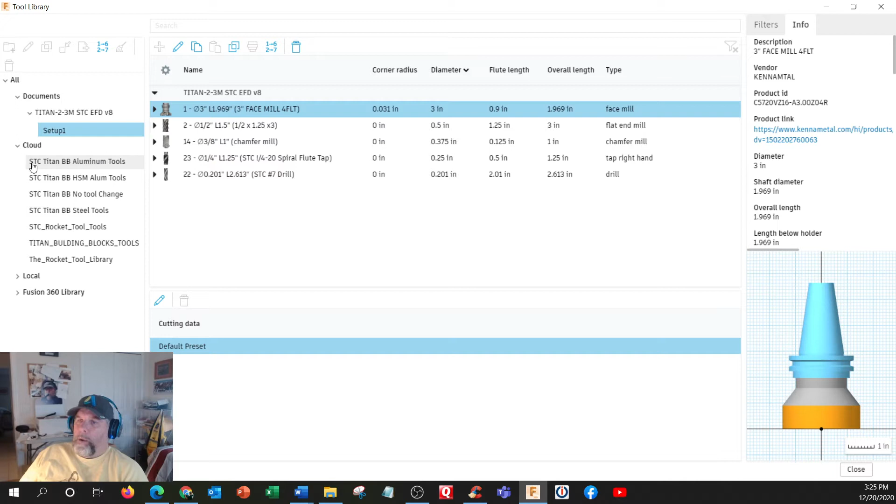So if I go into my tool library, and there's my setup right here. And I can tell these are the old original Titan tools. And now we're using our own STC Titan building block aluminum tools here. So I am going to swap over tools by operation. So the 1M's very similar as far as the operations go, other than we're using a tool 2 that is a little bit bigger, and we have different size threaded holes.

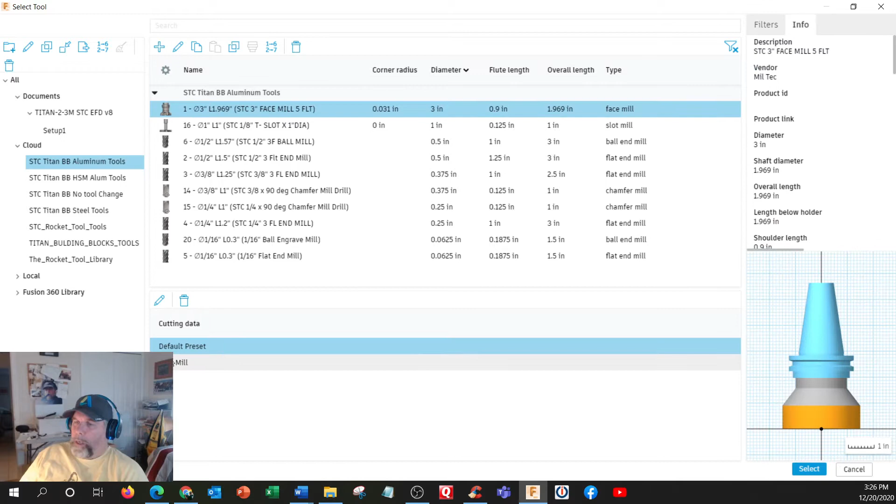So in the facing operation, I'm just going to go in and select right here, aluminum building block tools. I'm going to turn on milling, and this one here, the face mill. And this has the new preset data. So I'm just going to select that, and this one will be good to go. 3,183 RPM and feed per tooth. And we'll also have you do some lessons on what feed and speed is all about.

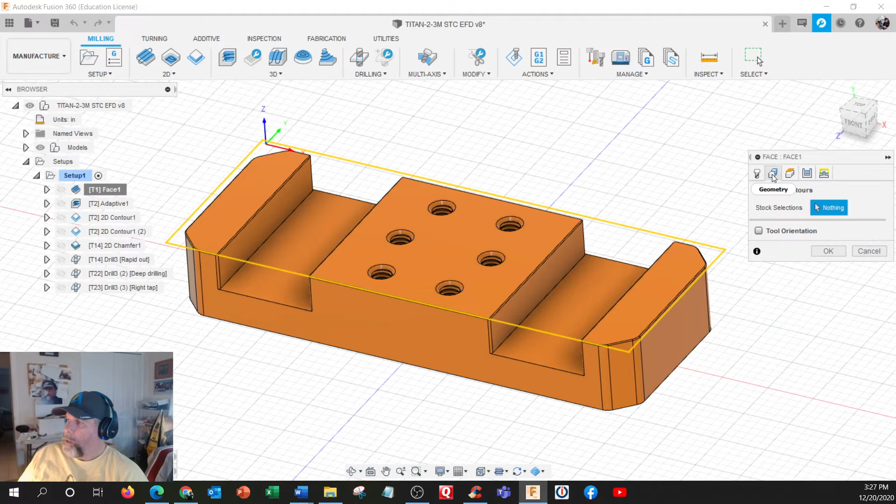Alright, so pretty much everything's pre-selected because I'm updating an operation. And before I do that, I'm going to look at machining time, and this is at 8 minutes 34 seconds. This is programmed with the original Titan method of 4,000 RPMs.

Okay, so I'm going to go the adaptive. I'm going to go select out of the building block aluminum. I'm going to click on milling, and I am sorting by size. Right here, the 3-flute end mill. If I go to setup 1, these are all the tools. Yeah, that was the original tool. So I'm going to go in here and get the...

And we're doing an adaptive operation, so I'm going to pre-select that data. So up here, this is my pre-selects. And now we're running at 5,920 at 62 inches a minute. And all these settings are still good. Model top, model bottom, optimal load. Now this is actually in the preset data, so we don't have to remember that, and the maximum roughing stepdown.

Alright, I'm just going to raise this up a little bit, or I can squeeze this up and I can hit the OK button. Okay. This one's got some recalculations involved, but that looks good. Now I'm going to go edit this one. And this has the old one, so this doesn't have the preset data, so we have to go select tools. So in this case, that tool is already in there. Notice it says this is the old tool and this is the new tool, the STC tool.

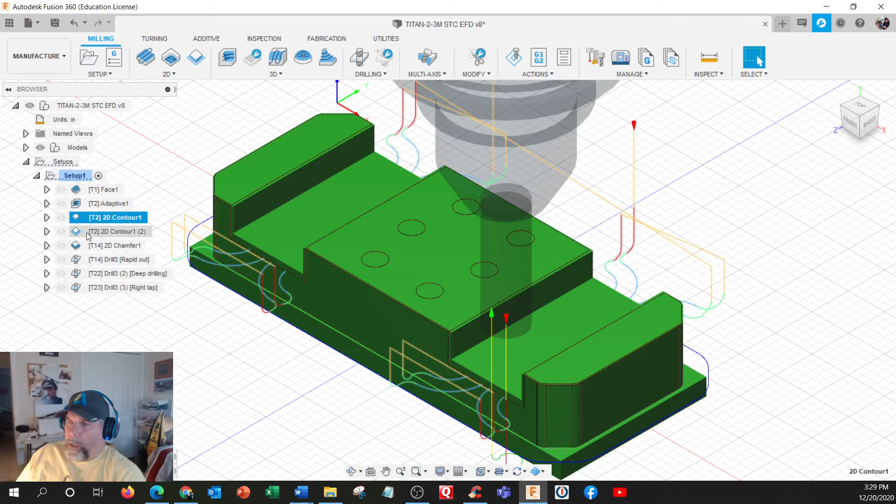So I'm going to edit this one. This one also has no preset data, so I'm going to go back into setup 1 and find the STC tool, this one here. And now we have two tools with the same tool number, so we're eventually going to switch over, and that's also a contouring operation. So I can pre-select it now. It says contouring there, hit OK.

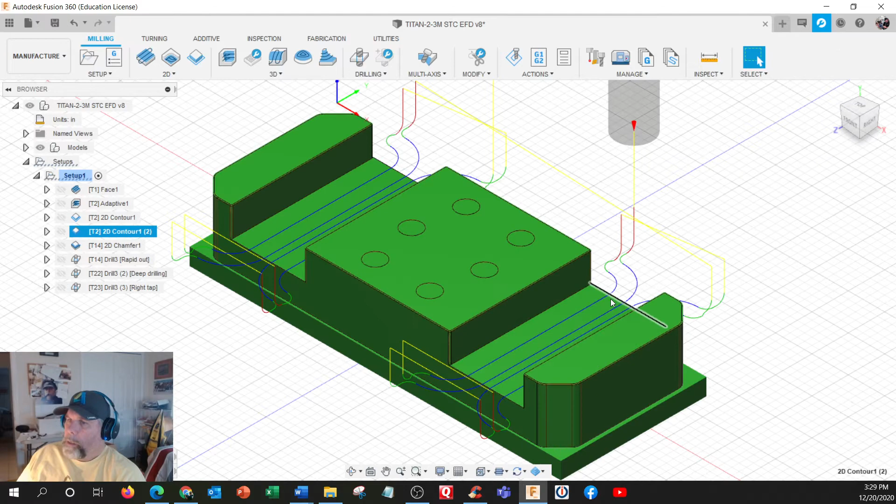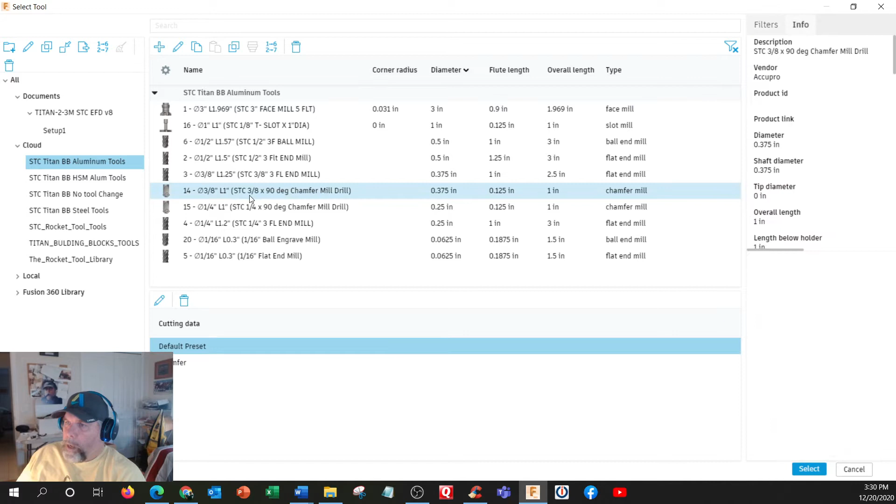Okay, now we have the chamfering tool, and I also notice, I think that has one too many cuts, but I think that'll still work. This is the chamfering tool. So I'm going to go to the new building block library. I'm just going to pick milling to narrow down the selection. And there it is right there, the 3/8 STC chamfering tool. We're doing chamfering. So I'm going to click the preset chamfer, hit select, and now we get 6,000 RPM at 30 inches a minute.

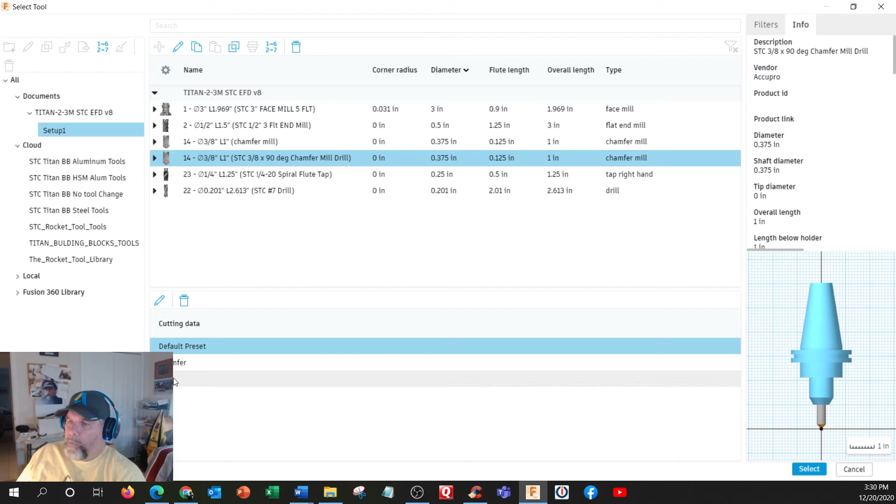Hit OK. And that tool we also use to do the spot drilling operations. So if I go to select the tool again, go to setup 1, and the STC, it says chamfer mill drill, and I got a preset for drilling. Hit select. And that one has slightly less RPM. And let's make sure our operations are correct. Model top with a negative, and we're using drilling rapid out. Okay, so that looks good.

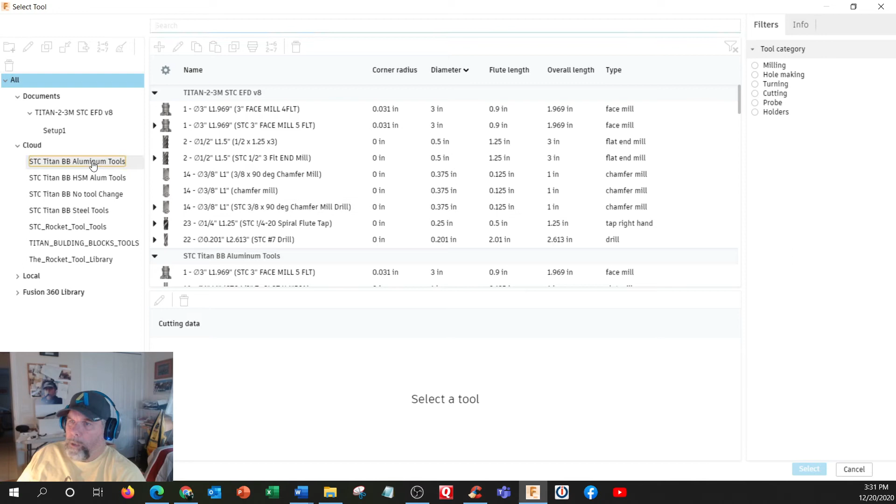And the last two I don't think are affected by the change. But let's get them all out of the library, so we're on the new library. That'll be hole making, that's drills. And this one is the 22 #7 drill right here. And it says right there, STC preset, so we can select that one. And that's all set now. I'm going to make sure it's model top.

And deep drilling. Now the pecking increment, we don't really get into this. We're going to start to step this up a little bit. We're going to use at least 0.100. I'm going to make this 0.100. This is a G83 peck drilling cycle.

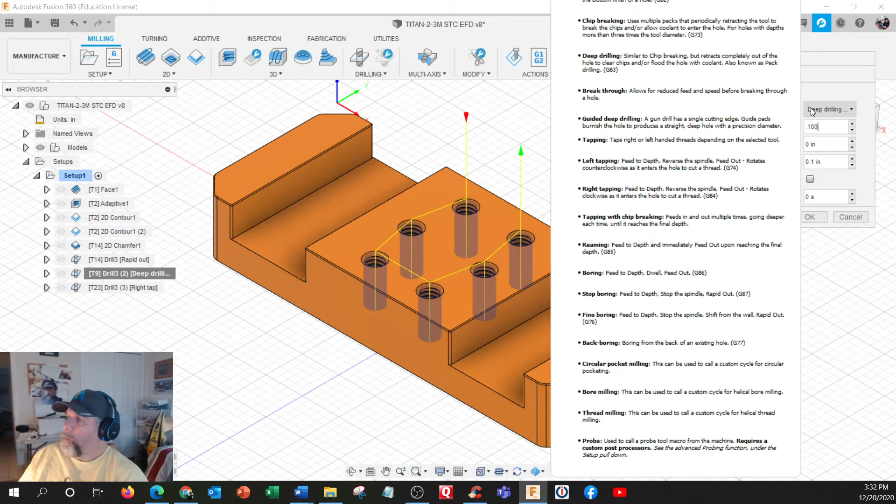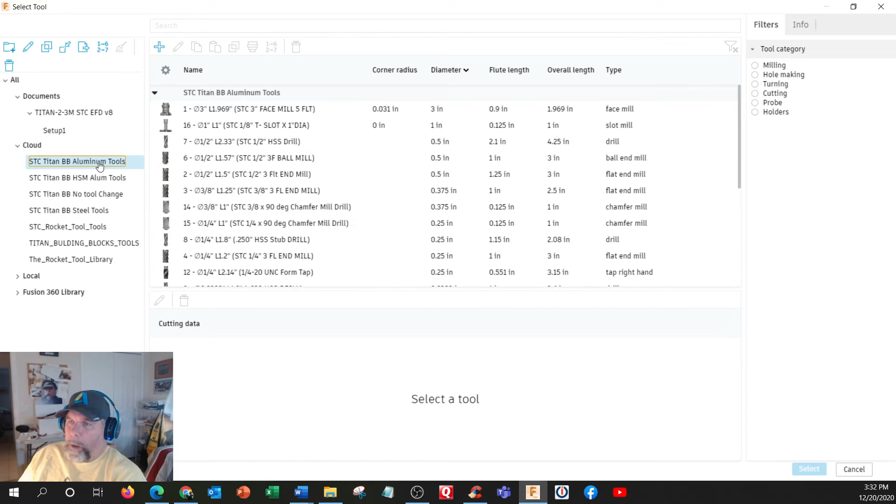Oh, a lot of information there. But it actually goes up and down, and this is the amount of peck. So I'm going to change that to improve that one. And I'm going to go in here and select, and I'm just going to go back into building block aluminum, hole making, and that would be the 1/4 forming tap. That one I don't think really changes. I'm going to hit OK.

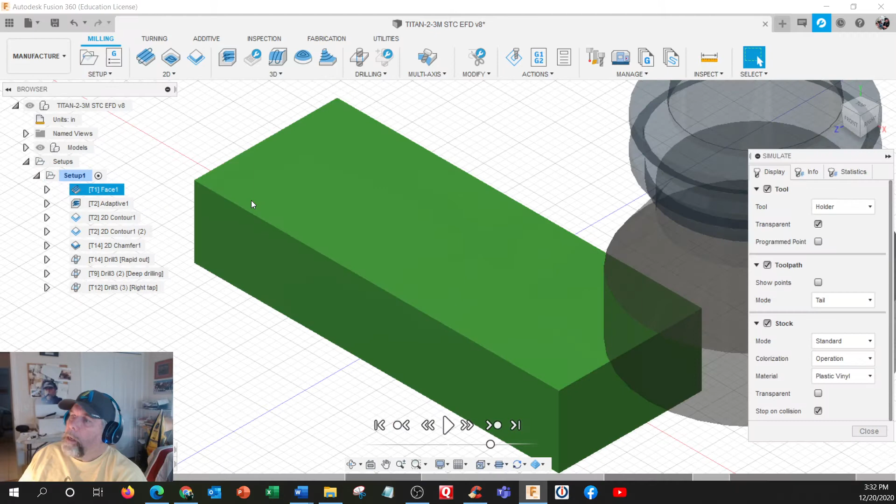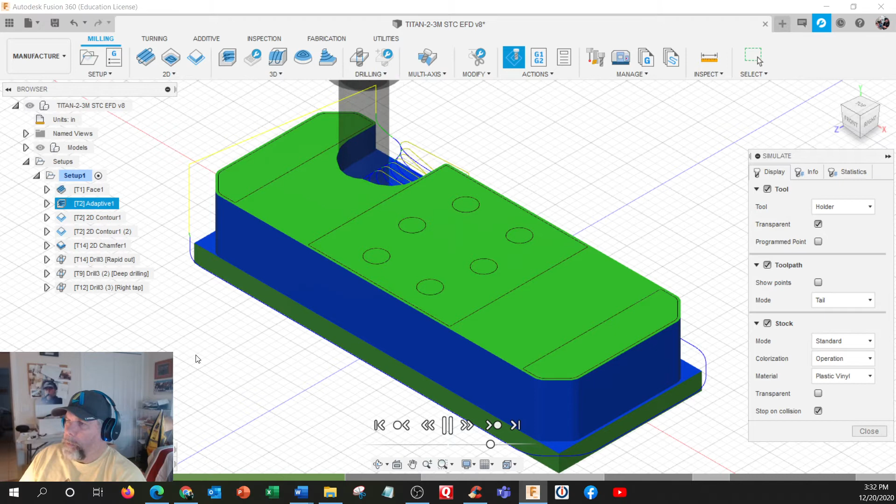Let's do a quick simulate. Simulate, and press play. Alright. Cuts the top. Everything looks good there. I'm using tail for the toolpath mode so we can just see where it came from. The yellow lines represent the rapid clearance moves, and this is the adaptive clearing. And that optimal load setting was the spaces between each cut. Yep. All right. And the preset data is more on target for the machines in our class.

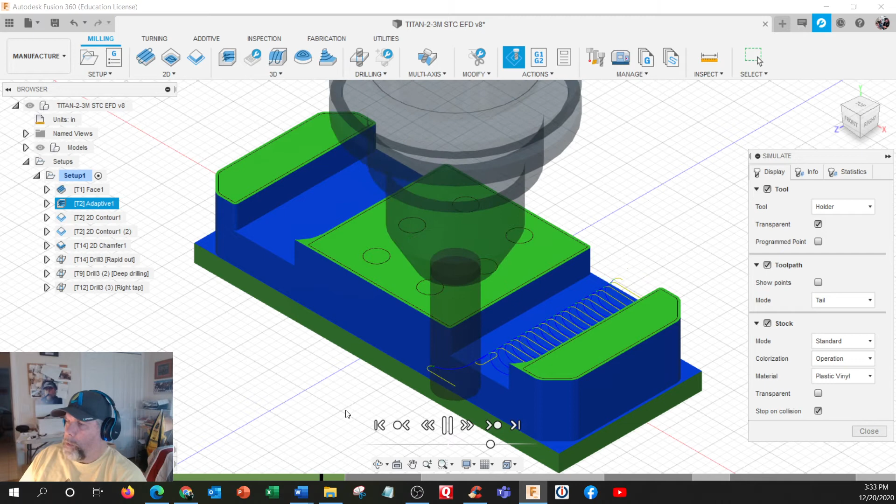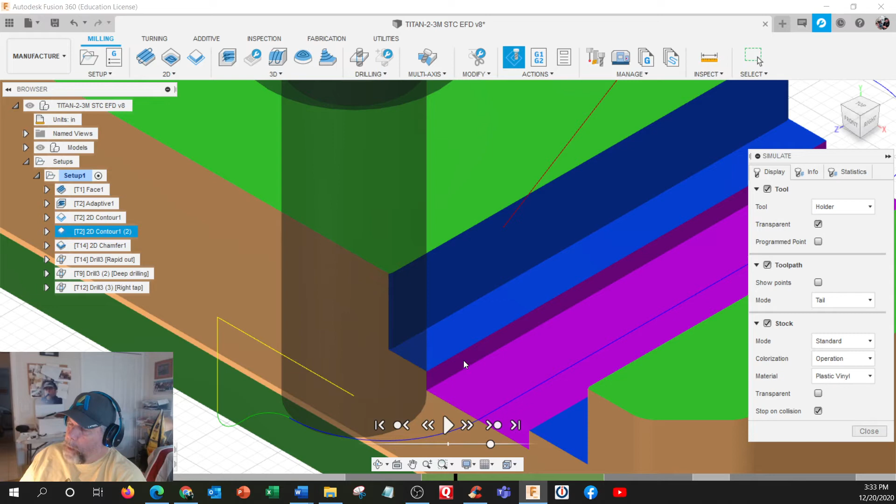All right, it looks pretty roughed out. Contouring move, that'll finish that. Now here's an area here, right here. This area right here, our goal was to leave 20 thousandths all over, and I was looking at this step here. And this would work, but if we were cutting tougher metals, this might be an issue. I am in contouring now, but I think the issue is really on the adaptive, because if you notice here, it's thin and it's thick here.

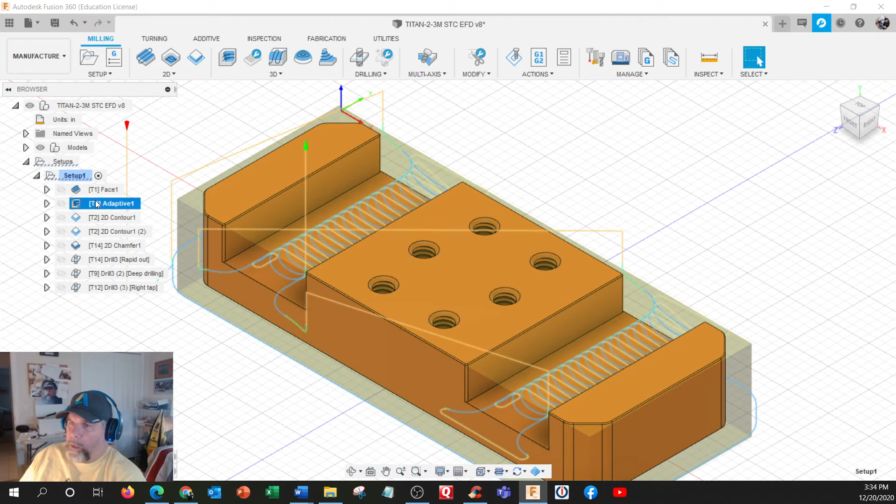I'm just going to hit close for a second. I'm going to go into adaptive, because there's a lot of settings in adaptive. So we had it preset, so it's got optimal load settings. That's the sideways cutting. And this says machining radius, machining cavities, and maximum step down. Now I believe it is slot cleaning, climb, fine step down. Fine step down for intermediate steps.

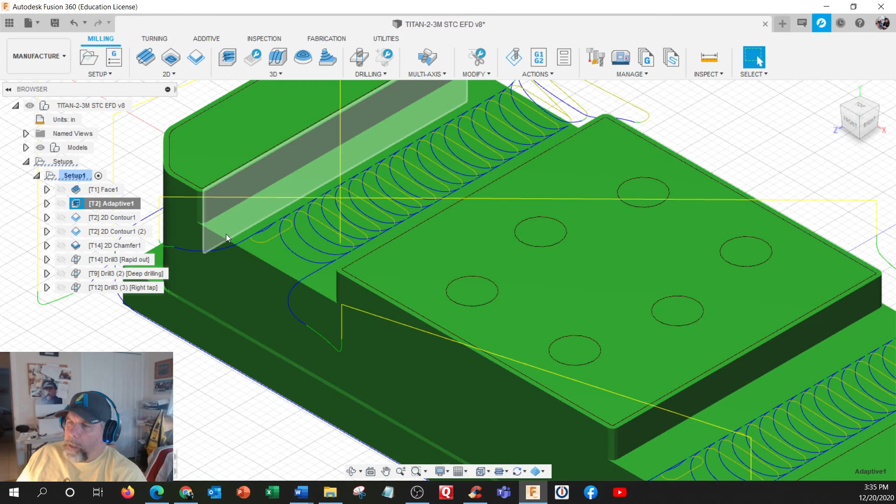So step down in 3D is really also step up, because it's meant to cut like a 3D surface, but we're using it in a 2D scenario, which actually works pretty good. I'm going to change this one to 0.2 just to see what happens. Now notice how this got very thick there, right? So that's when they talk about step up, this increment of how it goes up and over in a 3D environment. So in that case, I believe we need to make this smaller. We need to make this about the same size as the stock to leave.

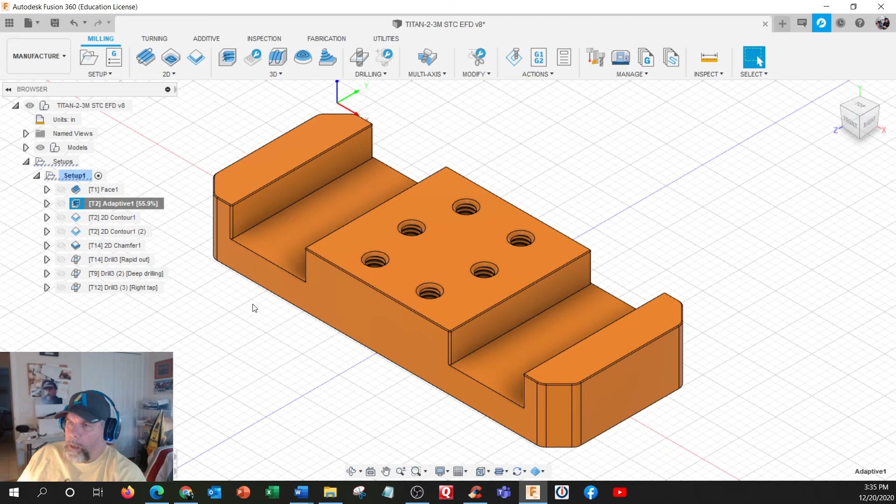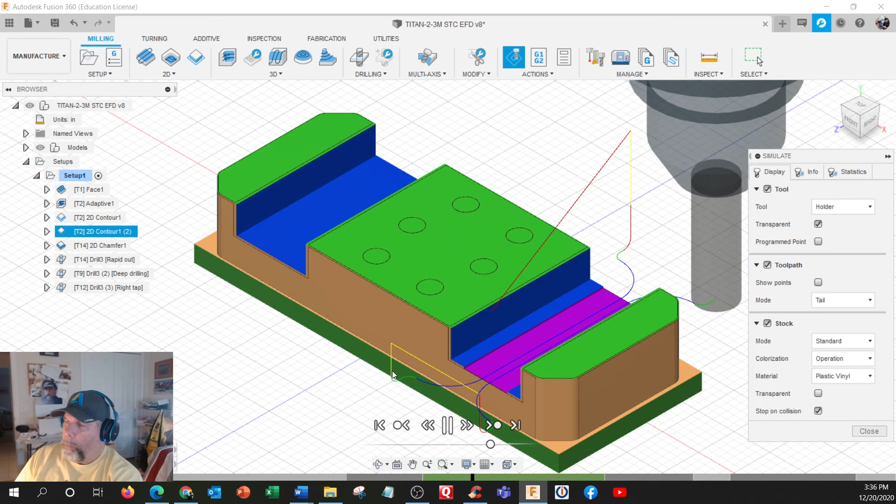Let that regenerate. And that looks a little closer. So let's do the simulate again. I'm going to do the jump ahead with the round ball. Round ball 1, round ball 2. And we'll check to see if the contouring cut a little bit deeper. And I could tell right there by the line that we're closer. So some of these settings you just learn a little bit about tweaking them. Like peck drilling setting, you can increase a little time on that.

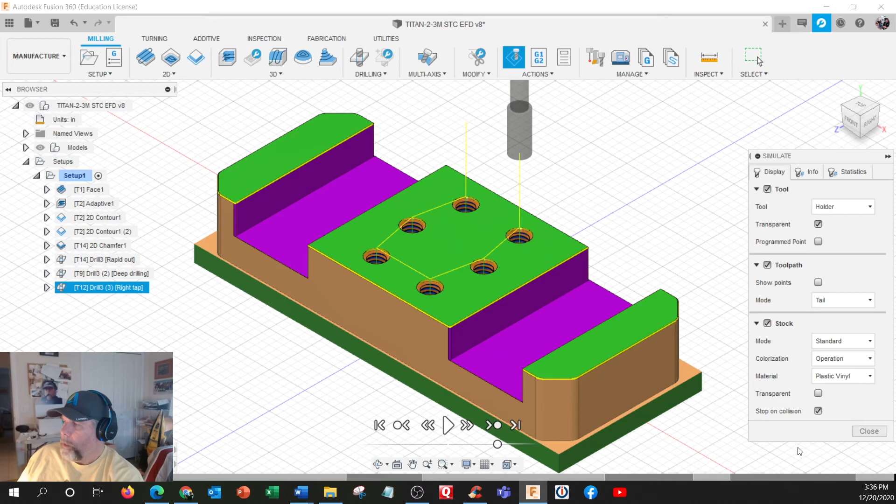Alright, let me just speed this up. I think we're doing pretty good now. Got the chamfering moves, the spot drills, and there's the peck drill, and then the tapping. Okay, close. I could have actually checked the time there. So the machining time is now 5 minutes. That's 3 minutes shorter. So if you were making 100 parts, you would save 300 minutes of time. That would be 300 divided by 60. Yeah, that'd be 5 hours of savings. That's pretty impressive.

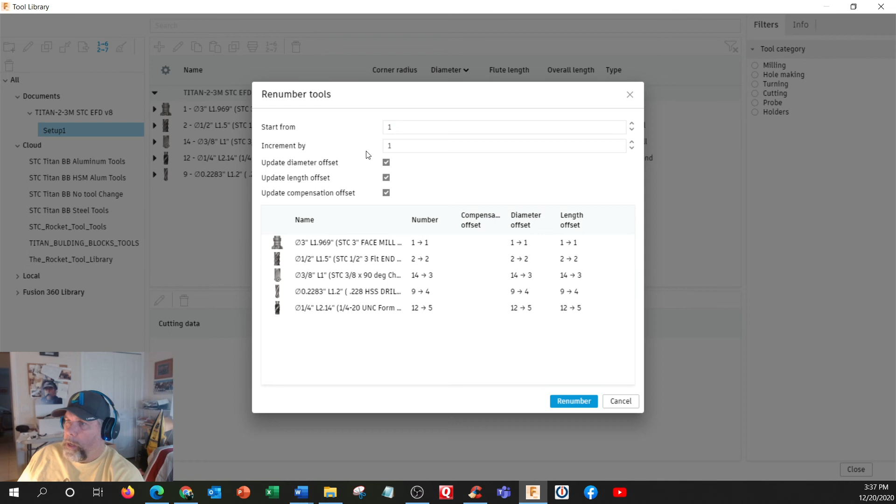Okay, these tools are not in order. They're tool 1, 2, because the tool library has them numbered and they don't have any duplicate numbers. So if I go back into my tool library, this is setup 1, which now has all the new STC tools in there. These will be the originals, but these will update. We need to renumber these so they're in order. We're going to do by order of operation, which will actually line up with our setup sheet. And I'm going to say start from 1 and use increments of 1. Just hit renumber.

And because we updated some info, it's just giving us a little heads up. Yep, and now they're all in order. 1, 2, 3, 4, 5. And this is something you can catch when you do the post-processing. So I do the post-processing, and I'm using my cloud post, which gives me just a limited selection. Notice right here it says Titan 1M. This is Titan 2M. So I know on this setup I did not fill out that tab. Right here, there's nothing there.

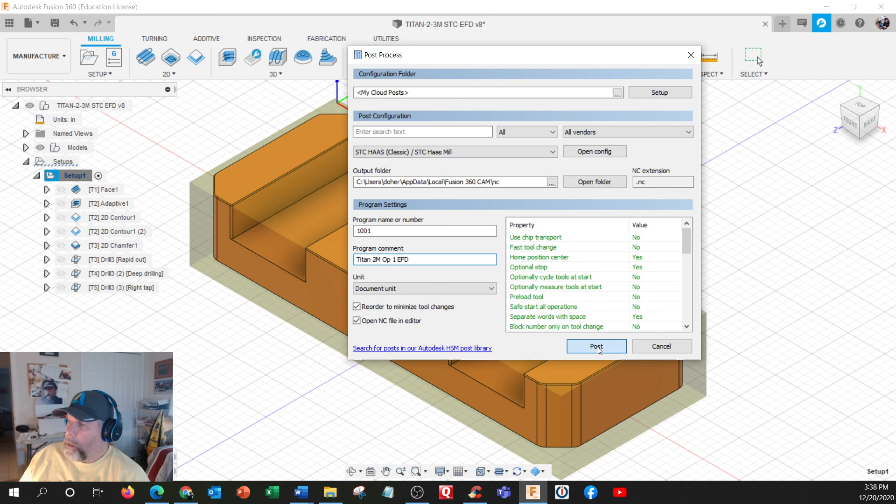Titan 2M. Op1. Okay. WCS of 001 would be good. I'm going to hit OK. Now I can do my G code, and there it is right there. I have it labeled correctly. I'm going to post. I'm going to save it on my USB as 1001. And I can review the code right here.

And this is also where I can catch if I forgot to reorder the tools, or if I didn't have all the tools selected. So I got 1, 2, 3, 4, 5. That's good. So this is ready to machine. Okay, we'll cover Op2 and also engraving coming up soon.